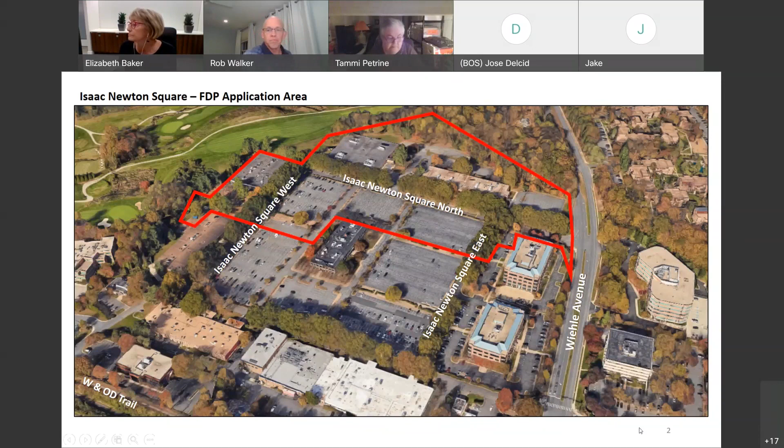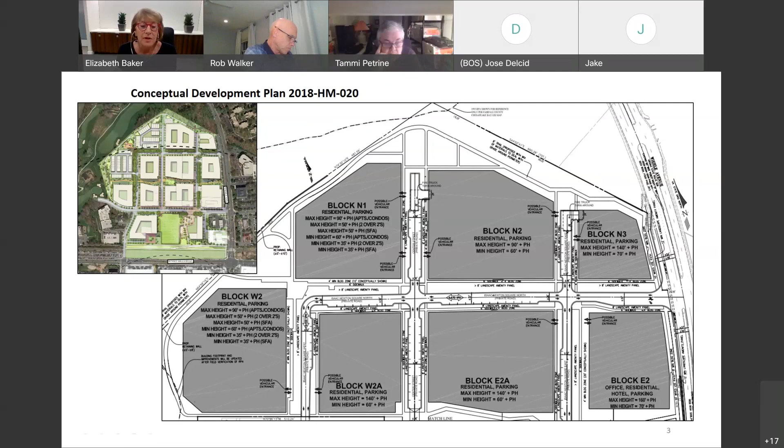In this CDP, there are certain spur roads as well. We have Isaac Newton Square East, which goes between blocks N2 and N3. We have Center Street, which goes between block N1 and N2. And we have Isaac Newton Square West, which is between block W2 and W2A. So you can see these are the building blocks of the future, but what we're going to talk about is just the road. So if you go to the next slide.

In addition to this, we're making improvements to Wiehle Avenue, from the northern property line to Isaac Newton Square North. What's happening there is the construction of a multi-use trail that's 10 feet wide, with additional landscaping between the trail and Wiehle Avenue. These are all 2-lane roads, and generally they have parking on one, sometimes both sides of the street. They measure typically 24 feet for the travel lanes and another 8 feet for the parking lane, for about 32 feet in width.

This is consistent with what is shown on the approved conceptual development plan. Next slide.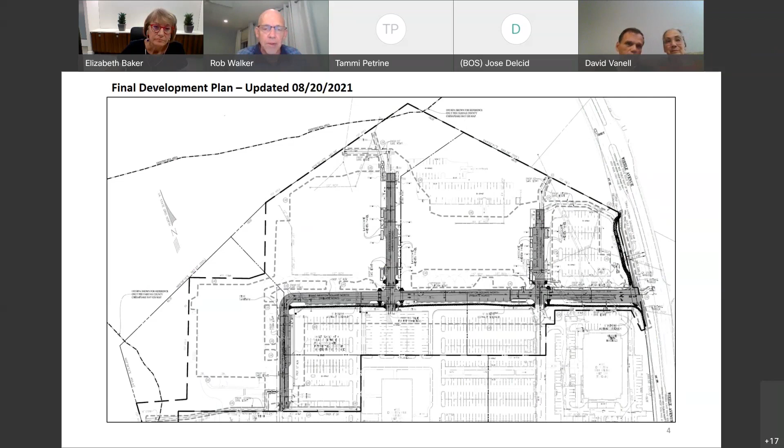The applicant did respond, and I do like the response. I'm still not crazy that there's that note on sheet C17 that seems to give a lot of flexibility about eliminating any tree preservation and tree save. So I'd love to see that note eliminated or removed entirely. I understand the goal of trying to create some flexibility, but that note was pretty broad, too broad for my liking on the FDP.

So with that, let me jump in and go to, let's see, Rebecca. Hey everybody, thanks for your presentation.

I also had a little concern about the distance between the sidewalk and the roadway, especially on the Wiehle side, where you're going to have utility underneath that pathway, and then 12 feet, and then Wiehle. I'm a geotechnical engineer, and structurally you're going to have compacted new fill, and typically our recommendations are that you extend that new fill 5 feet from the limit of your sidewalk or paved area, which actually encroaches into that area of the landscape.

And we've been seeing a lot of issues with landscape areas in Fairfax where the soils are just too compact because of the structural need when placing it, that even when they excavate it out and try to place something in, there has been some difficulty for the trees to take root and survive in those areas. So that's my primary comment and concern in that region as well.

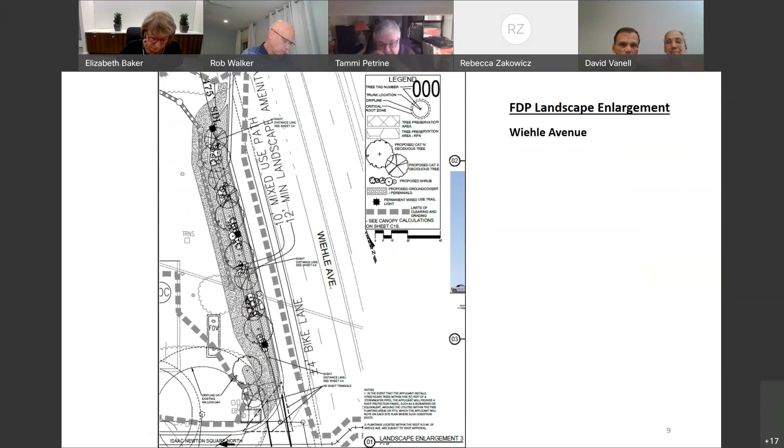Thank you. I am equally concerned with the trees. I just wanted to clarify, when you said this is the street layout only, I'm assuming that there are utilities under the streets as well as storm and sewer lines. Is that correct?

Right, this is an infrastructure plan. It does include some utilities as well as the streets themselves, so we're not going to have to tear up the streets later. We're doing it with this, what will be a public improvement plan, the site plan that will follow this, yes. Okay, and how old are the willow oaks right now?

I don't know exactly how old they are. They range from about 30 to 40 inches in diameter. I think they were probably planted back in the 1980s, something along those lines, when the development first started.

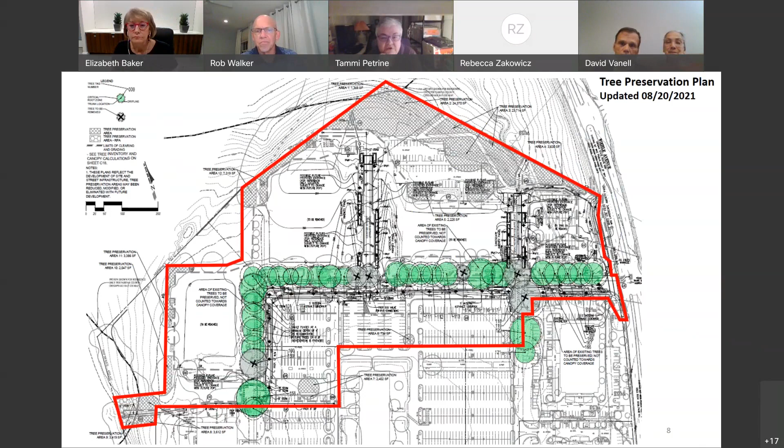My concern is with the street being immediately adjacent to those trees, and the roots communicating both with their neighbor trees and going under the street. When you put the new street in approximately the same area and you're really digging here, we saw on your preliminary concept plan that you were making all kinds of protections for those roots, keeping machinery away from them so the compaction of the soil would not happen. I don't see how you have room to do that, given this tight location adjacent to the trees.

Well, this is the same plan as the CDP with the proffers that are approved. It does talk about being very careful with how the demolition goes, not only for the streets themselves but for the patio next door and the buildings. So we don't envision using heavy equipment next to these trees. It will be much more low impact, by hand in some cases, taking up the street. That's all part of the tree preservation plan that has to be approved by the urban forester before we can do any land development at all.

He has to pass judgment and say our methods for preserving the trees are adequate. There will probably be root pruning and other things the arborists will propose and the UFMD will agree are the best ways to ensure the longevity of the trees.

Yep, this is Frederick Rothmeijer. As I understand, and we looked at this in depth when we went through the CDP and worked with the arborist of Fairfax County to come up with the plan, the root zone does not go under the current streets. Since there is no water coming through the street, there would be no significant root growth under it.

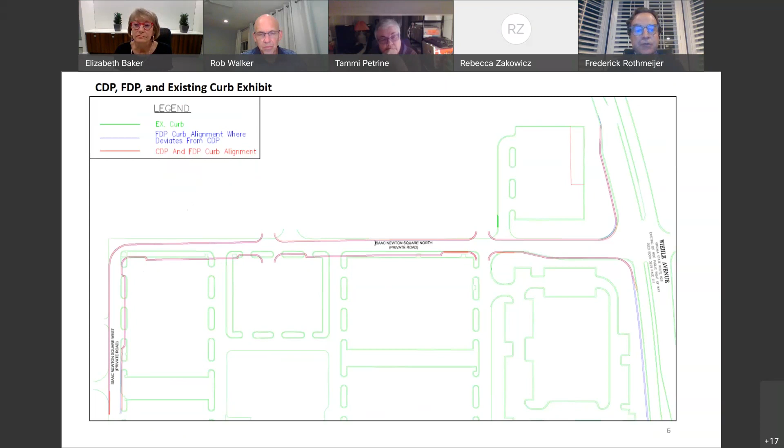As you can see, as Isaac Newton Square North goes to the west, we're pulling the street away from the trees, because the current curb and roads are closer there to the existing trees than where we're not pulling it away. So as Elizabeth said, we're not going to put heavy machinery in the Willow Oak zone. We will be working from the current roadbed and away from the Willow Oaks. We'll have further detail, but we're not going to put big backhoes outside of the roadbed.

As you are concerned and want to preserve these Willow Oaks, so do we. This is an asset for the property. We're fully focused and committed to do everything that is good for these trees to maintain them.

I'm hearing what you're saying, but I've been on a construction site or two, and there's no way in hell you're laying sewer pipe by hand without having backhoes and heavy equipment in there. That's what I don't understand. So the root zone is not under the road, that's not where the roots are, because it doesn't have water infiltration.

I understand that theory, but when we were doing the environmental plan with the same forester you're talking about at Fairfax County, we learned that the drip line is not the end of the roots. Yes, there are more roots on the other side, and yes, there's not a lot of moisture under the road, but I am very concerned if you lose these trees, what is plan B? Because we're trying to have every possible mature tree in Reston preserved that we can.

Isaac Newton came in and we were thrilled this was going to be a neighborhood of park-like development with these mature trees. You're already challenged with your conceptual plan of having huge high rises to the south that will shade these existing trees on the east-west private road, which are the majority of trees we're talking about in your FDP plan here. What is plan B if the trees fail?

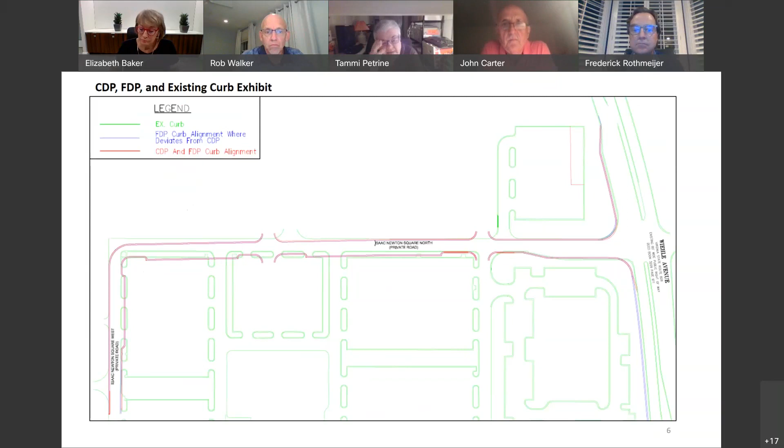No, in the plan, are you planning to have, you showed, Elizabeth showed the slide with the temporary sidewalk on the south side of the street.

Are you planning to have a sidewalk or a boardwalk on the north side of this? Correct, and it's as close to the planned buildings as possible, per the CDP. Those boardwalks would be on sleepers, as we discussed with the CDP as well, but yes, it's pulled away from the trees.

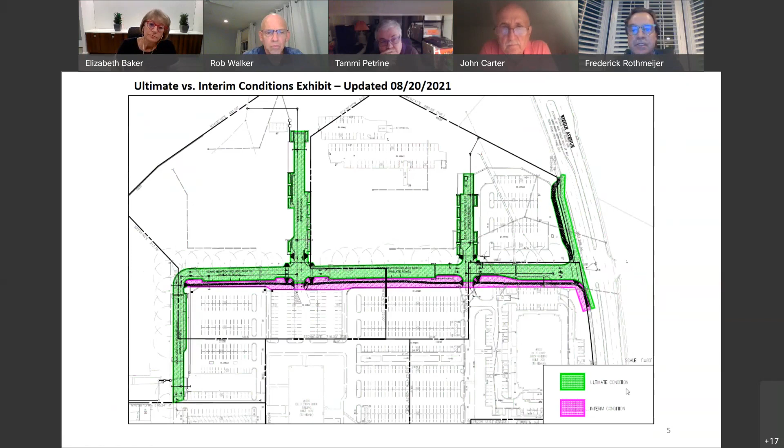I don't know if there's an exhibit going back to the CDP in here. Not in here, but we're going to look quick from the CDP for some images, because Tammi, you're right, that area is planned as a park-like setting and is designed to be very sensitive to the trees. It has boardwalks and the like in order not to impact the critical root zone. Bernie's looking for it now. Maybe we'll find it and show you, but the commitments to that are in the proffers, and we're fully intending to make plan A succeed.

Thank you. I think everybody on this committee is nervous about this, very, very concerned. So thank you.

Thank you, Tammi. Vrushali. Thanks, Rob, I don't have any questions. I had one question with regards to stormwater, which was already asked and answered. And then my other question was the same as Katie McLean's, which has been answered as well. Thank you.

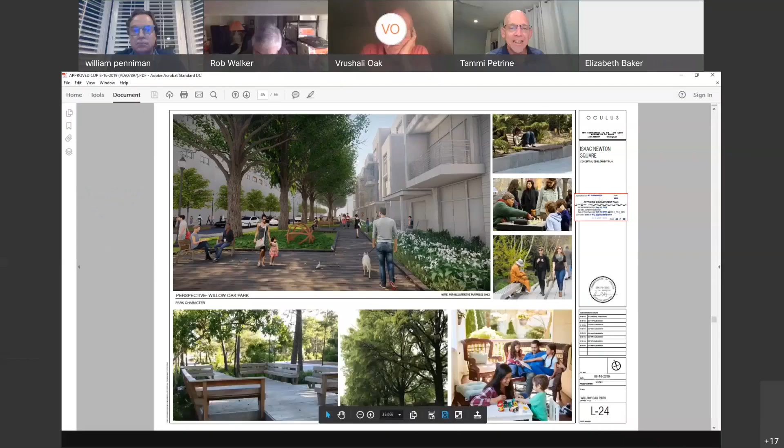All right, Mr. Penniman. Hi, a couple of questions. One, you talk about the interim lighting you're going to install, and I wanted to get a sense of what the interim lighting is versus the long-term plan for lighting, and what are the characteristics of it in terms of type of lighting.

Okay, we also have an image of that, but while we've got this up, let me go back for a minute to show you an image from the CDP of this oak walk, for lack of a better name, where you can see how far back the boardwalk is set from the trees in order to maintain that. So I wanted to show you this is the image we're all committed to creating, this park-like setting, this promenade along these mature trees that will continue to grow and survive for many years.

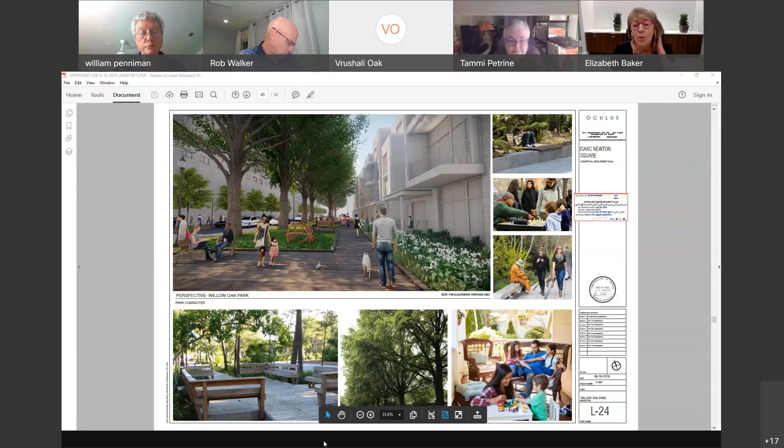We have an interim street light. Bernie, can you find that one? Okay, we're working on that. We're putting the street lights along Wiehle in permanently now, and that was a fixture county staff asked us to use. On the interim, these are pedestrian type lightings. When we go to the final development plan for the first development, that's going to set the stage for the materials, street furnishings, and light fixtures that will be used consistently throughout the development. They may be different than what's on Wiehle, but they will be consistent throughout. So that is yet to be chosen, but for the interim, we're finding it here, we do have an image of it. Sorry, we're not as fast on the imagery as we'd like to be.

No, that's okay. On Wiehle, is there a conformity to other lighting in the area? If you worked it out with staff, I assume that's the case, but can you answer anything on that? We asked them what they would prefer as their street light there, and they provided a particular fixture and we included it. I don't know that they've used it elsewhere or not. Certainly a question I can ask them, but I don't know if other applicants have used the same light fixture.

Okay, in terms of the stormwater management, if I recall correctly from the paperwork you submitted, you proffered to retain 25% of a one-year storm on site. Is that correct? Because you're also showing tables here on 2 and 10-year storm retention, and I wanted to get some sense of what percentage is retained on site with the vaults and everything else in the 2 and 10-year as well as the 1 year.

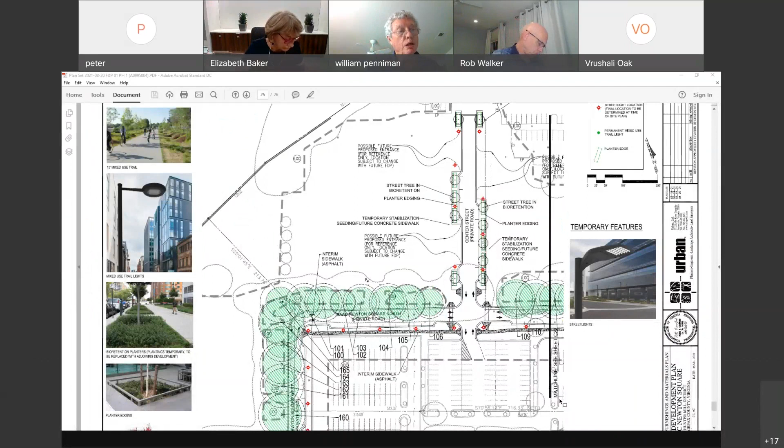Does that answer your question? Because I don't, the percentage question, I'm not quite sure how to answer that. Are you asking like of the site area, what is the percentage of the area that's being treated? I think in the existing comp plan, there's a requirement for developments that involve existing impervious surfaces of more than 50%, that there has to be a 40% reduction in the runoff as part of that. Now you're saying you're returning it to good forested conditions, so that may be more than a 25 or 40% reduction, but I don't know. And that's why I was using a percentage term, but can you relate those concepts?

Yes, and I'm going to look up the percentage. The comp plan has a 20% reduction goal. The proffer says that you're going to reduce the volume of runoff to the 2-year 24-hour storm by 25% from the pre-development runoff amount.

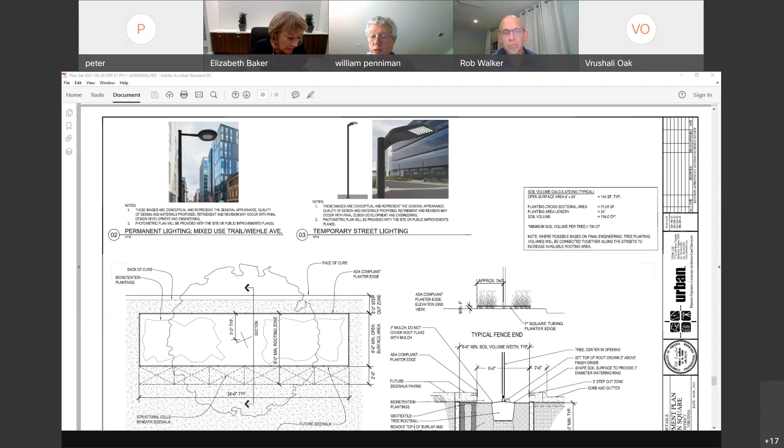Well, that's right. Or there's alternate methods, which is essentially what the county recognizes as the energy balance method, which means if you can't reduce the actual volume of runoff, you over-detain the rate of runoff in order to make up for the increase in volume. So the theory behind energy balance is that the volume of water times the rate of water in the pre-condition should be the same as in the post-condition. So if you increase the volume of runoff, you have to reduce the rate even further to make up for that volume. That's the alternate way of meeting that requirement, which we are meeting with this plan.

And how does that relate to good forested conditions? The layman's way of answering it is we're not adding any hard surfaces, impervious surfaces, we're taking away, correct, Pete? Yes, on an interim basis. And then all these tree site wells are basically storm filters. Well, yes, that's part of the answer. So in the interim condition, because we're removing buildings, we're actually decreasing the amount of impervious area. However, all the computations and the sizing of the facility are in anticipation of those areas that we're removing being infilled with future development. So that's really a temporary condition where we're reducing the impervious area.

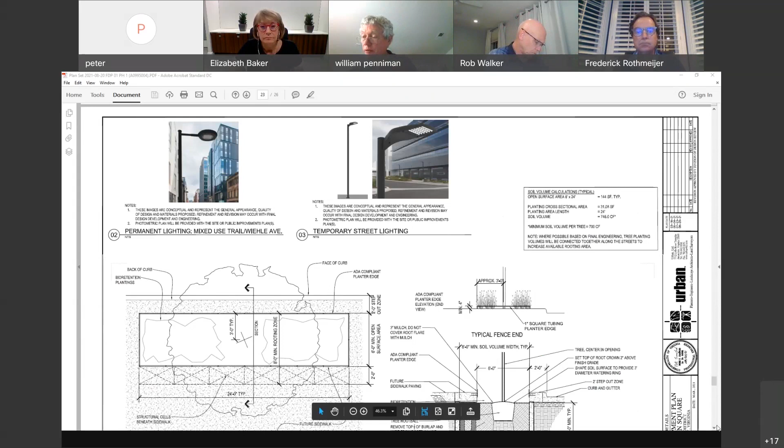Thank you. Oh, one other question, just to give us a sense, if you have a vague sense at least. This is an interim movement to lay the groundwork for upcoming development of new buildings, which in this area, I guess, are all residential buildings. Do you have any ballpark sense of when that may start?

We don't know for sure. We're hopeful that we'll be having an FDP on one or more blocks on the north side of Isaac Newton Square North in the next 6 months, but can't promise. That's our best guess right now.

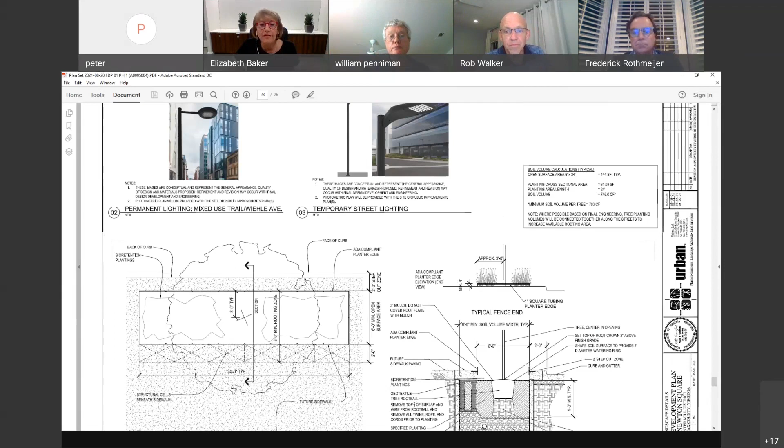Just a guess. Looking at the plan we have in front of you, Bernie, if you can scoot it down a little bit, the fixture on the upper left is the trail. Uh-oh, what happened? Something happened. Sorry, here goes, it says it's scooting.

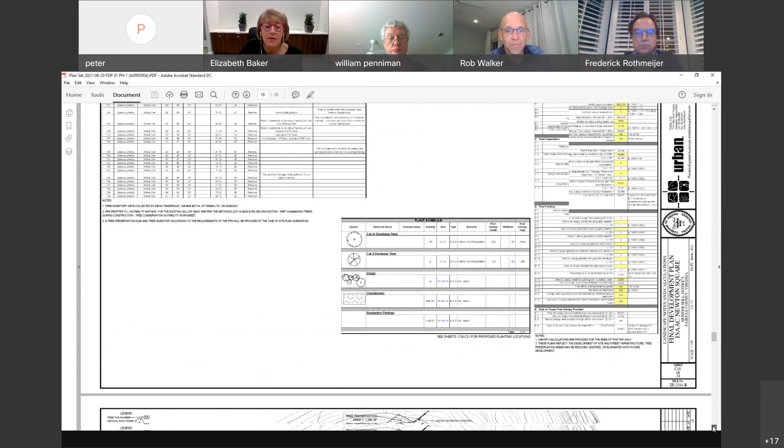The one on the upper left we're going to see is the one that goes along Wiehle Avenue, and the one in the center on the top that we're going to get to is the temporary one we're looking at. It'll be based on the photometrics. We're showing three of them along Wiehle Avenue, but we will have to do a photometric plan with the PI plan. Okay, that's good.

So the one on the upper left is, as I said, the multi-purpose trail one, and this one, which is a little different, not as round, a little more oblong, is the temporary street lighting for the south side of Isaac Newton Square North.

Do you know the color temperature you're going to be using, is it LED for one thing, and do you know the color temperature? I'm going to punt that one to Pete if he knows the answer, because I do not know the color temperature. I don't know that either, Elizabeth.

If you could look into it and consider the impact on birds and wildlife, bats, birds and wildlife, because that's what color temperature is relevant to. Insects as well. All right, good to know.

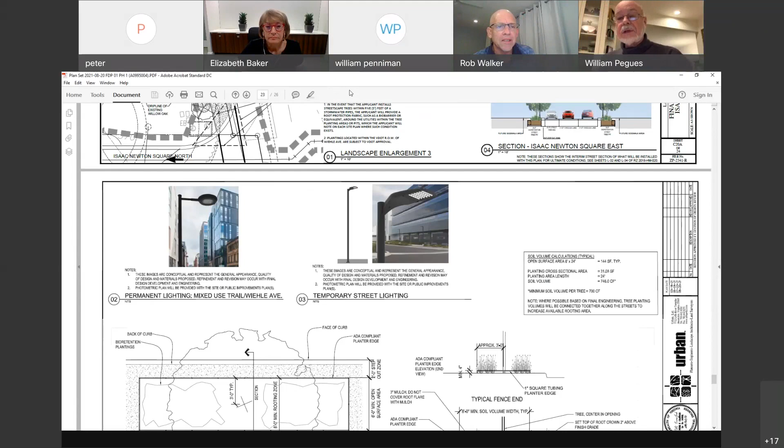Actually, there can probably be a pretty quick response related to the color temperature of the lights, because there was a lighting fixture study that actually picked those, related to Reston Board of Directors. And the paper went through the other committee that I'm on, the Environmental Advisory Committee. So that's probably out there as to what it is, but whatever temperature, because the power company is providing them as some kind of a discount. There was some discussion about the color temperature, and that was approved in an actual paper that's available through Reston Association.

Anyway, the other thing I wanted to mention was that regarding the rainfall and stormwater retention systems, of course, county requirements are essentially the minimum, not necessarily the best practice, but they're the minimum. And regarding stormwater, besides just what's being done at the streets and in the infrastructure, vegetative roofing can provide a tremendous amount of control. You can put vegetated roofs on any kind of structure, including wood frame with a wood deck, and it works just fine and can really help retain a lot more water.

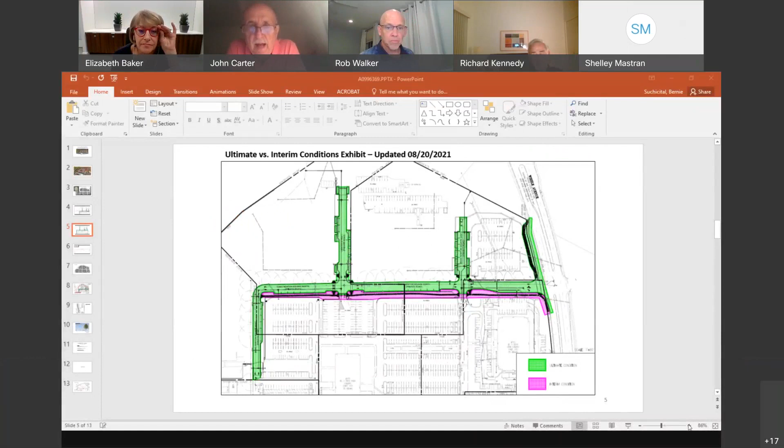That one with the two colors, I think green and red. The green and the pink one from the PowerPoint presentation is probably the best one. It's hard to see because it's such a big area on such a little screen, and it's difficult. Can you make it bigger with the slide? There's another one too. So I didn't realize that pink.

I thought you were just going to the curb. To the extent that you get over into the sidewalks, I think we don't want to commit to that. Well, the only place we are doing sidewalks is the ultimate trail along Wiehle, because it's just a good thing to get that established and get that going. And we're doing an interim sidewalk along the south side, because we need to provide pedestrian access to these existing blocks on the south.

These buildings are still there, people are using the parking lots, they might want to take a walk at lunch, all those kinds of things. Staff in particular wants to make sure the interim conditions will be useful and attractive to people. Because to be honest, we are planning to build on the north side first. Those blocks are going to be what you see here and a little to the west. So what's going to stay on the south may be there for 5 years, it may be there for 7 years. We don't know, so we want to make sure we have pedestrian access.

That's, in my terms, the green and the pink or red, whatever color that is, the actual extent of this. Anything in the pink is interim, and the final will actually come back as part of the site plans for those buildings on the south. Is that correct? Yes, that is correct. I think that was clear, maybe other people realized that, but I don't think it was clear — but definitely when you get to the presentation.

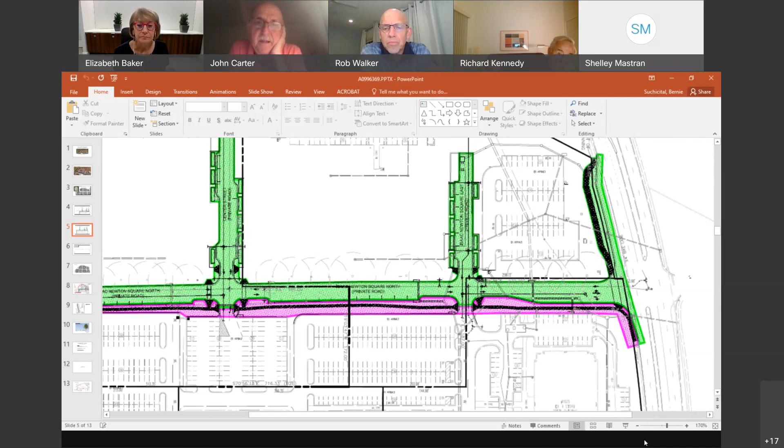Now I do have some issues. Number one, the Wiehle bikeway — that hasn't been on there before. I like that better. I don't like the trail, and why are we doing an on-site trail in addition to an off-site trail? Are we actually moving the curb on Wiehle? Maybe that's too technical, but... We are doing it, it's a couple of feet, moving the curb just to create the bike lane.

There will be an on-road bike lane and there will be a multi-purpose trail — both facilities are planned. Why are we doing that? Because you cannot get to the on-street lane otherwise; you'd have to go across the grass and jump the curb to get to it. Why would we do that and move the curb?

It's part of the comprehensive plan to have this multi-purpose trail. It's not that specific, well — I don't see the bicycle plan for the county, it shows on-road bike lanes, so we have to provide the on-road bike lanes, moving away from on-street bikeways in general. Then the multi-purpose trail is designed all along the west side of Wiehle, going all the way towards the metro station. It's supposed to be continuous, and it takes different forms — if you look at the comp plan, the closer it gets to metro the more urban it seems, and further away it gets looser and more suburban. Both of those are comp plan elements we were asked at the rezoning stage to accommodate.

Rob, if I could interject here, John — my recollection is that when we talked about the pathways that needed to be enhanced or built during this new comp plan, the idea was that along the major streets we should have separated bike paths and walking paths. And I think Wiehle was a specific example of that when we went through it.

Without seeing a more comprehensive view of the whole area and the latest thought for this corridor, and having co-chaired the Wiehle Avenue pedestrian crossing right up the street, there's even yet another study that's going to be conducted by the county to figure out the best thing to happen along Wiehle Avenue from a pedestrian, bike, multimodal point of view.

I think that just goes to Sunset, though. I don't know that it would go this far up. I know the study was supposed to at least go to the W&OD trail.

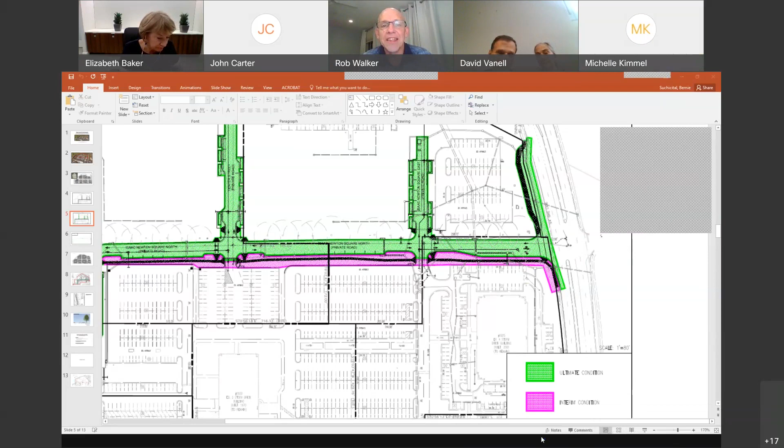That's correct. Can you hear me now? Yes, John, we can. John, are you still with us? Do you have any further comments?

Hey, Rob, while you're waiting for John Carter, can you hear me? This is John Kauppila. Yeah, John, I got you. Do you want me to just go real quick while we're waiting for him to reconnect? Sure. Okay, if he jumps back on, I'll stop.

I totally agree with all the comments we've heard so far. What I was going to suggest on Willow Oaks is that perhaps we get a cross section showing the trees, the road, the utilities, how deep they are, their area of influence when you're digging, so we can really understand that. And I think you said it, Rob, really showing a defined tree protection plan and how we're going to save those trees, because once you kill them, that's it.

Their plan B is not a good one, as Tammy talked about. And I saw that there were some electric lines and lights on the north side. How you do that is going to be essential, because if you just run those lines right along the route boundaries, that in and of itself will take out the trees.

Two other separate comments, one regarding detention and stormwater. I do know that Hidden Creek is working with the county on dealing with the flooding issues in that area, which we all know there's quite a few. I think dumping the water just onto the golf course and that whole system without really coordinating that with Hidden Creek and the county is missing a very important point here. So I think that's key — how do we incorporate this stormwater into that system correctly without adding to the problems we already have?

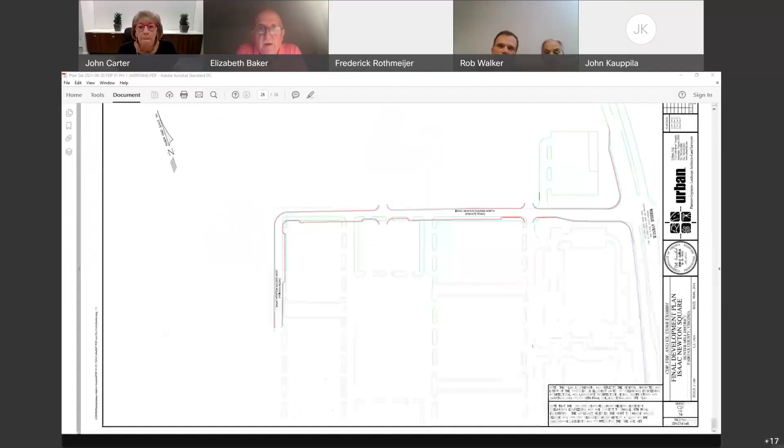My last question on the trees—could you pull up one of those drawings that has that on it? Why are you moving the curb on the west side of this? The west portion of this street moves the curb, which I think puts those trees, to the extent that they're over there, in jeopardy. We're pulling them away from them, John.

They're on the north side there, so we're pulling the curb away from the willow oaks. They're actually getting a little bit up in that, where that corner makes a hard turn there. That is where the road is moving away from the willow oaks.

That's where Fred was telling you, they're a little bit closer in that location than to the east. So we have tried to pull the curb away to give them a little bit more room for the future. Maybe it makes some sense to do it that way.

I was listening to Tammy and others talking about keeping construction away from those trees, and that looked problematic to me when you're moving curbs and things, but maybe you can do that in a delicate way. It's, I guess, a compromise between the existing curbs being too close and trying to preserve them by moving the curb farther away. Maybe that'll work. Okay.

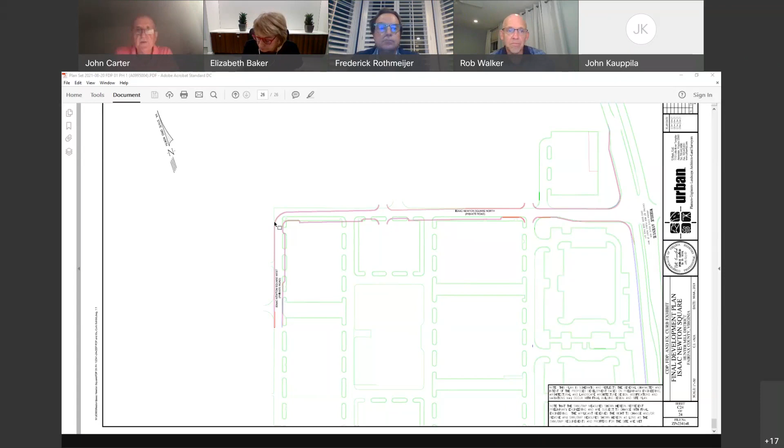I still don't like the street width. I really don't like 12-foot lanes in pedestrian oriented places. Maybe that's an issue with staff.

It's not too bad, but we really—I mean, it's 12 feet, including the gutter pan. You have a gutter pan, then 10 feet of asphalt, center line, 10 feet of asphalt, gutter pan. So, I know. Yeah.

There've been presentations to the Board of Supervisors, particularly by Rachel Flynn, saying we shouldn't have anything bigger than 10.5-foot lanes. I think we ought to be minimizing paving for a couple of reasons. One, there's an environmental reason, but there's just a pedestrian oriented reason.

We have a terrible street plan in Fairfax, particularly on the private streets. We don't have one street in Reston, one new street that supports pedestrians getting across it. And you can't get to the metro station easily. This is a tremendous problem with the Silver Line.

And the Planning Commission has recognized this, and the Board of Supervisors has recognized this. I'm not sure the staff has or has not picked up on this issue, and we have got to get changes to this. Maybe this one is okay for now, since I think it's the first one that's coming to the commission since those follow-on motions have occurred.

But you know, this is just a tremendous issue. If you can't get to the silver line, we've wasted a lot of time doing comprehensive plans and increasing density and spending hundreds of a million dollars on a transportation system that you can't get to as a pedestrian. So as this one moves forward, be mindful of this.

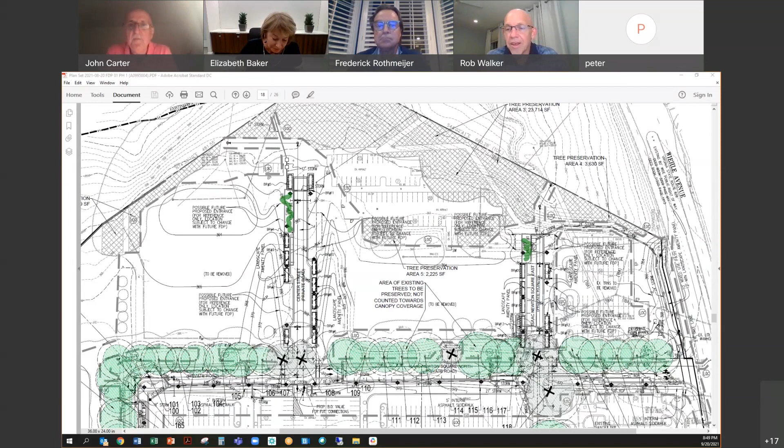All right, that's enough of me, but I do think these street standards are a problem that we keep using and we keep failing. I think staff assumes staff gets to pick those street widths. I don't think that's the case. I think that's up to the Planning Commission and the Board of Supervisors. So be careful of that.

It's a little more difficult on the public streets because you've got other people involved. You've got utilities and you've got state highway in addition to Fairfax County. But I hope you can do something special

on the private streets. And I like the section that you've shown, and a hint at the kind of fixture that you would use. I hope we can come up with something like that. Maybe the first application that comes in for a building where you're actually doing the streetscape, we can put all this together in a very convincing way. Really important, something to do.

Otherwise, you can't get to Metro as a pedestrian. Well, believe me, this development wants to get to Metro. I would have thought so, yep. I would have thought a lot of other ones do too, but okay. Thank you, thank you, thank you, Mr. Carter.

So we've had a lot of comments tonight. The applicant is going before the Planning Commission on Wednesday, so we need to decide where we're going from here. It would take a motion from someone to act on this application tonight. I will just first say I'm recusing myself from voting, just so I get that clear. But I guess, any final comments, or does anyone have a motion to put forth?

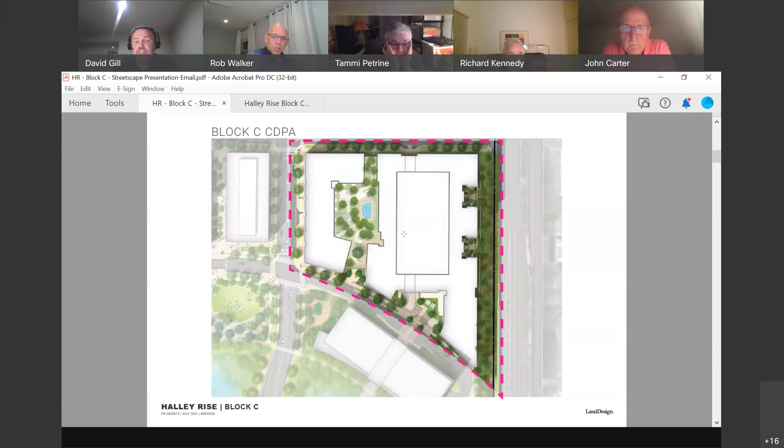But that's how we're designing it now, and the level of amenities that we're talking about with this particular application. The limits of the CDP or the FDP itself are the sidewalks around the property. We are not touching the public roads C, A, or Reston Parkway as part of this application, just to give you some additional context there as well.

We'll go ahead and jump into some of the larger community elements. We brought forward the same design team that Brookfield used with the larger CDP so that we have continuity of design palettes, the types of plantings, widths of sidewalks, the type of paving that we're talking about. So this is showing what we're talking about in our pedestrian zones throughout the 4 sides of this project.

These are the same furniture too that we're committing to, benches, the same milieu for the lighting, bike racks, cafe seating throughout the project, again, to mirror the public realm being established by Brookfield as part of their project.

I'll try and jump through this pretty quick because I know we're running late here, Rob, but this just takes you around all 4 sides of the building. And again, it really is a 4-sided architecture.

This is looking south, so almost as if you had crossed over Wegmans and we're walking down the sidewalk down Road C. On the left side would be the retail environment that we're establishing, really trying to activate this plaza with active uses. I'll show you how far down the retail goes in some of these other slides.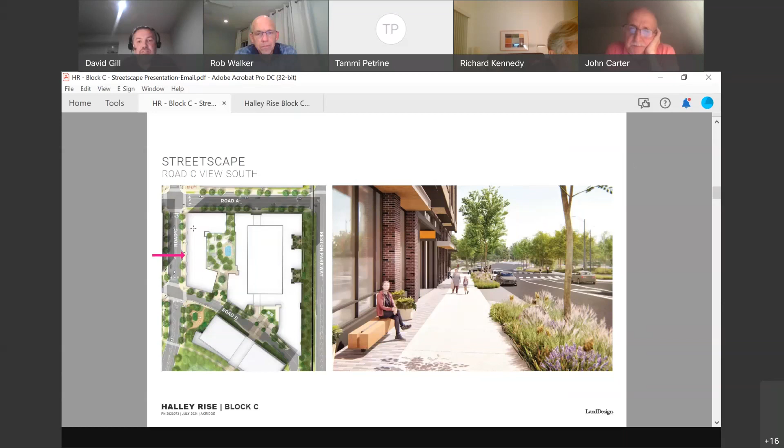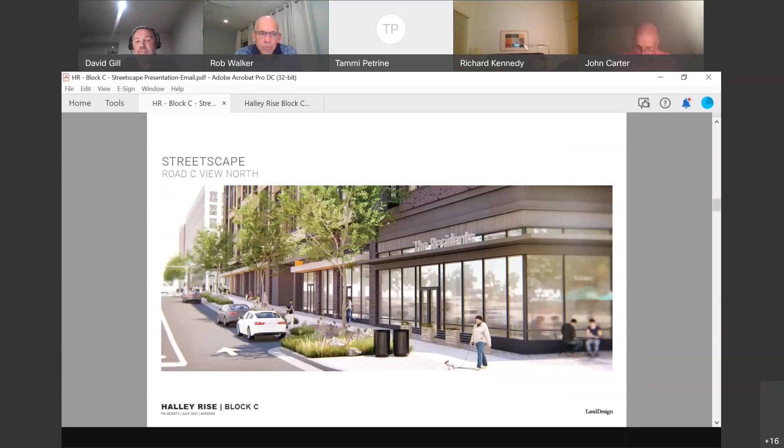This would be the same look looking back. The Wegmans would be up here at the corner. Our residential lobby here at this corner opposite the two parks. Our retail here and here anchored along this side of the street.

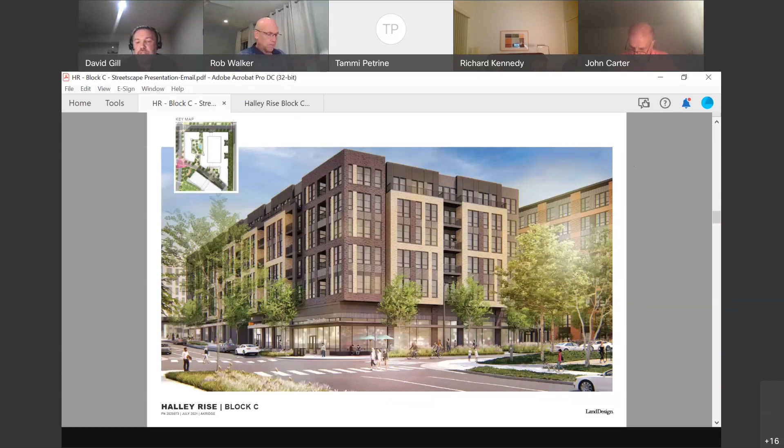This is pulled back to give you a sense for how finished we think the architecture is going to look here. A variety of textures, primarily masonry in a lot of these facades, use of balconies, and a variety of window sizes. You can see in the background a little bit of how it differentiates from the other building that will be the rental building that is wrapping their parking garage.

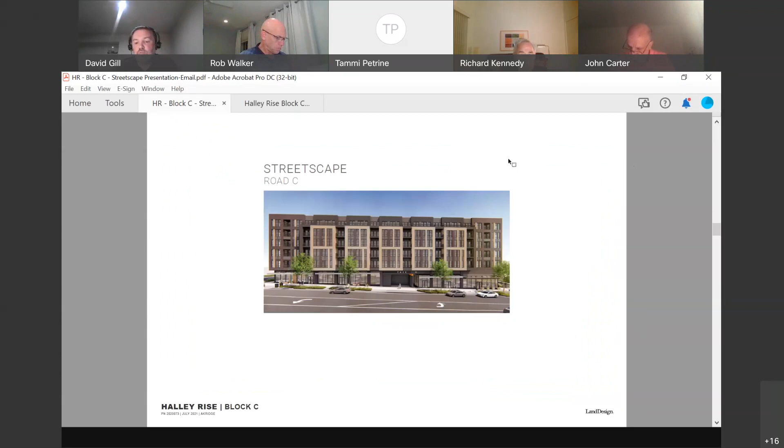We go ahead and jump forward again. This is the facade itself. This would be looking across Road C, so looking east in this direction. You have your retail all along here and here, and then the residential lobby here as a way to really activate this key Road C, which is our main pedestrian street.

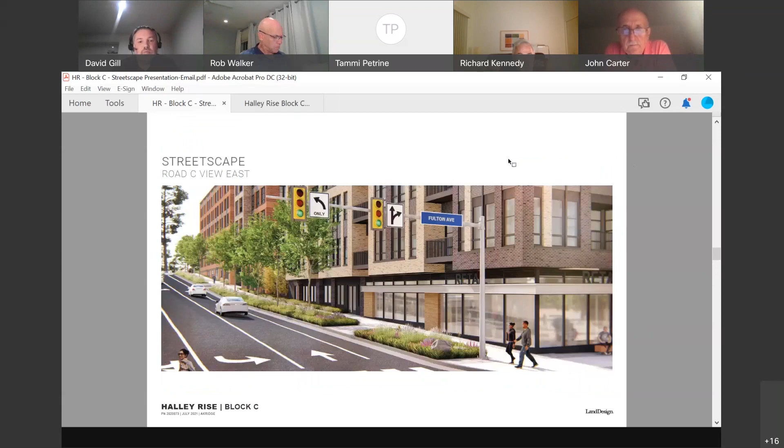Apologize as we jump through. So this is what is thought of as directly opposite as you go up the corner.

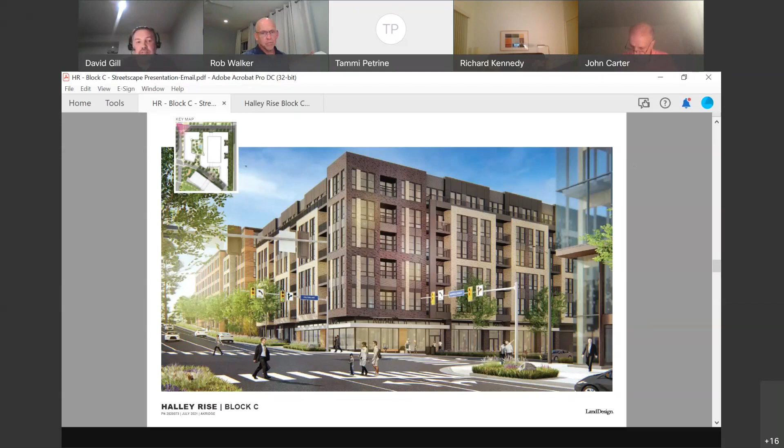I'll keep going through here. This is what it would look like if you were standing basically looking out from where the Wegmans was. You get your retail on the corner on the right side, come up the hill, going to Wegmans on the left. This also shows the differentiation in height between the two buildings, the two different palettes being used to distinguish the buildings themselves.

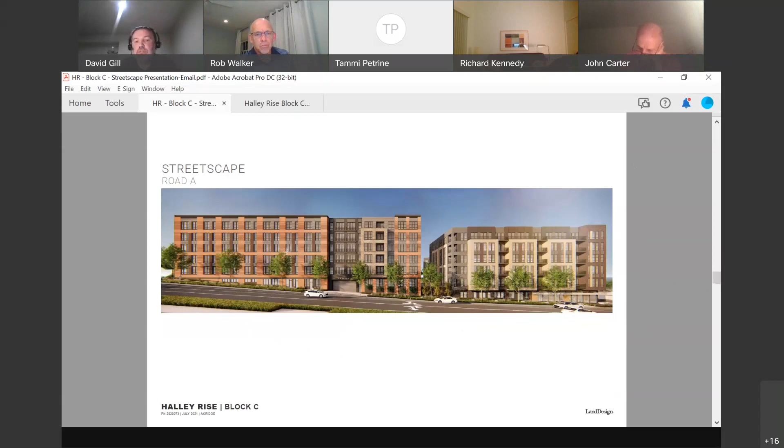Apologize for that, that's a fast forward here, guys. I'll jump back.

This takes you around the corner again. So this would be Reston Parkway, looking at the building from Road A. Again, it falls away to the right where you go to Wegmans, and then to the left as you come down Reston Parkway itself.

It shows the same double row of trees committed to with the CDP FDP, as well as the trail itself that's being put in. And then what we really worked on here was providing a variety of depth and little private courtyards to break up the mass of this facade along Reston Parkway.

As importantly, it helps us wrap the garage behind it, so you only see finished residential structure from Reston Parkway. There is no parking structure that you see. It is truly a four-sided building in that regard.

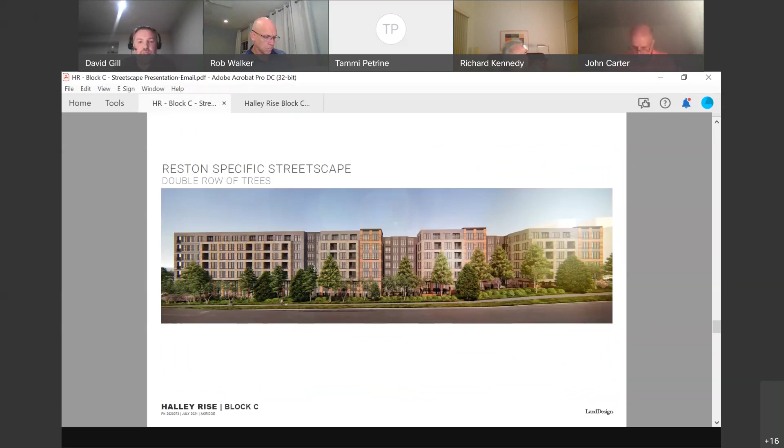This is how it looks from Reston Parkway as you come down. On the right, again, would be that Road A, all the way down to the left. You can see those two courtyards that we're using to break up the mass, and then additional smaller variations in the facade as you keep moving down the building.

This is our entrance here to the primary residential lobby and the primary entrance on Road D to the parking structure. This parking garage is, again, shared parking for this existing office building here, as well as for the residential.

So we worked hard with staff on coming up with a design that bifurcates the residential and office uses after they park. The office users would come in now to this shared garage, park, come down an elevator bay here, and have a dedicated pedestrian walk over to Office A. This is a segregated pedestrian entrance that is separated from the primary vehicular access right here.

So if you're coming to the office building, you come down, come in here, get out, and then walk across without having to cross in front of the main pedestrian drag. There is a lay-by here as well for drop-off for the office, and then a smaller lay-by here for drop-off for the residential.

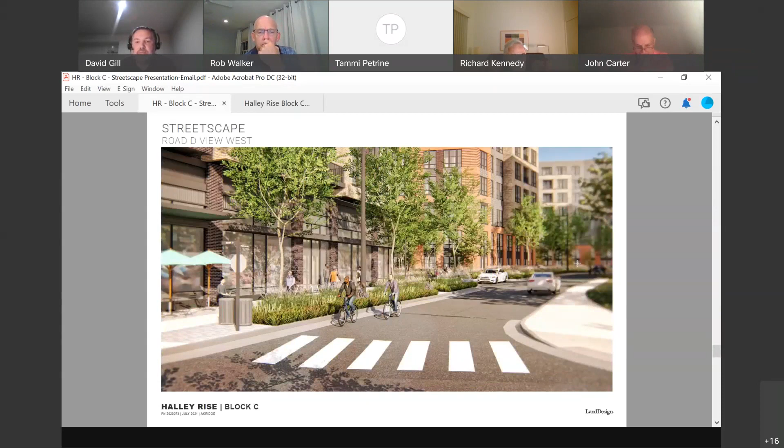This again just gives you a sense for how that would work in practice. A little bit of the lay-by is shown further down. You can jump forward - that's how we're talking about it working here.

So you have the lay-by in front of the office on the left, in front of the residential on the right, and then a dedicated pedestrian crossing here. It's also going to be a raised tabletop so that it really signals to cars as they come down that they're entering a pedestrian realm, and that they need to make their decision to enter that garage now.

Further down, it is essentially a service connection. The only thing really there is loading for the residential building itself as you go down Road D. So we're really trying to encourage that movement into the garage and make it separate from the pedestrian.

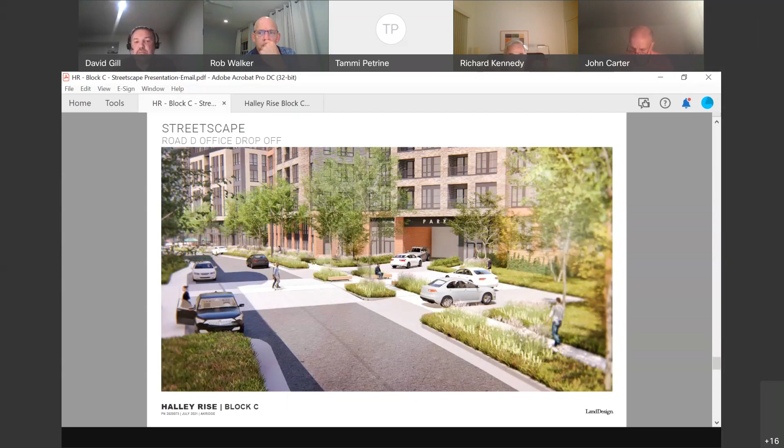This is how it looks from the existing office. If you sort of fisheye it a little bit, it's not quite 100% perspective, but again, it gives you sort of a view for what we're going for.

We do have this elevated courtyard up here that would provide amenities that could be shared between the two buildings and provide some nice views down onto the parks that are proposed both to the south and southwest from here. And then on the north side, there's also a jump lobby that allows you to get down and cross over to the Wegmans.

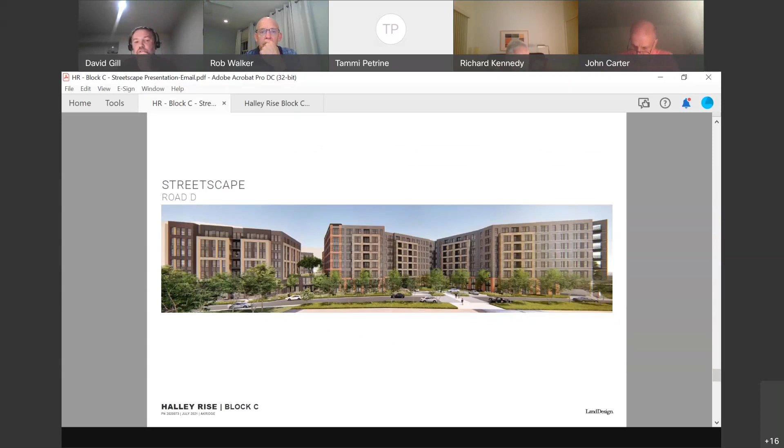I'll keep my presentation brief there. I'll ask Jay Johnson if he has any additional comments at Meridian, but that's really what I wanted to share with you tonight - making sure we have any preliminary concerns from you guys addressed as we move through getting our final report from staff, which we're hopeful will be probably mid-October at the rate we're going.

On behalf of the Meridian Group and Anchorage, this is Jay Johnson. I'm an independent consultant for the two firms that David mentioned that are co-applicants on this project. It's a pleasure to be here. I think David has summed it up quite well with the presentation, and we welcome your questions.

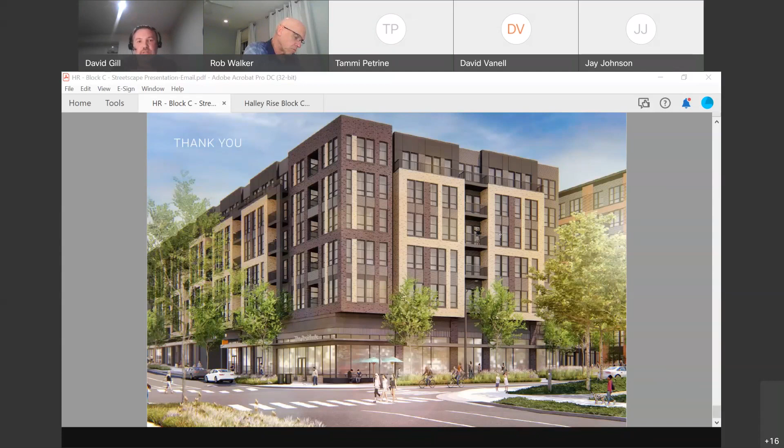So it is at a FDP level, and Pete Crawford, you can help me with the precise numbers here. But again, it fits into the larger Halley Rise project. Let me see if I can page back up. Is that by county standards? Oh, absolutely, and in fact they've gone above and beyond.

So these parks, and Mark Looney, if you're still on, you can correct me if I'm wrong, these parks are being installed currently across the street from us, and they were intended to serve the entirety of the Halley Rise project. So I understand all of the...

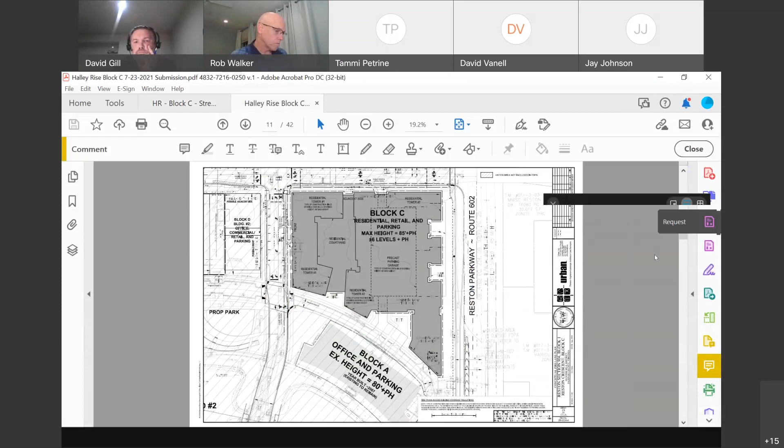Just reacting to the streetscape character - I'm looking at page L04B. I'm just struck by the massiveness of the buildings and lack of greenery, and I'd like to see more. In Reston, we go far beyond what Fairfax County demands for open space, and I think even though it's in the TSA area, I would like to see more greenery. Also, I don't know if you're planning greenery on the rooftop.

Yes, we are looking at trying to install an intensive green roof on this plaza, and we're working with staff on precisely what we need to do to meet that objective. So we will be including that in that location.

Let me just jump in generally on the overall development. The entire Halley Rise project has a proffered conceptual development plan that includes both an open space standard as well as an urban park standard applicable to the development overall. As David mentioned, there are a series of park facilities being provided, and a lot of it is surrounding the existing stormwater management ponds, which are being converted into true amenities as opposed to places to collect rainwater.

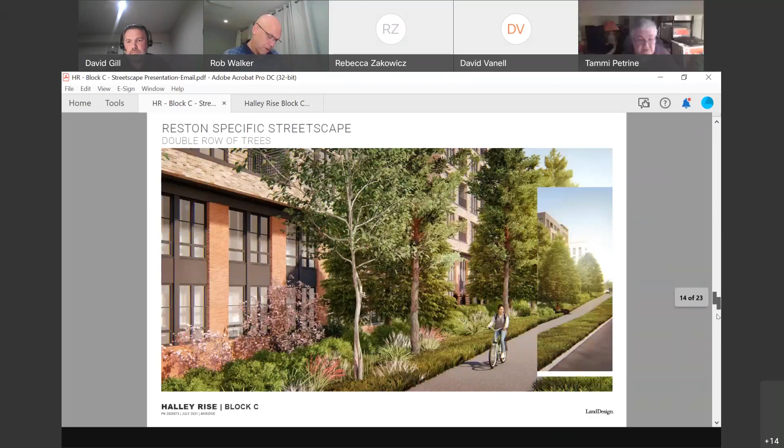I noticed, or I think I read in your plans, that you're considering putting all of the WDUs in Tower 2, which is the rental unit. Is that an error in what you sent us? I'm a little sad that some of the WDUs wouldn't be in the purchase building, which is Tower 1, the west building, correct?

No, that's correct, Tammi. That is what that note says, because we're still wanting to make sure we deliver all the units. We're still deciding on that western building, whether it's going to be ownership versus rental. But you're right, that is precisely what that note says.

And the reason is because that's the building that is very likely going first. When we take down the surface, we have to build that garage first to provide that office with their replacement parking. So we'll be delivering very likely that building on the right first, and that gives us the opportunity to deliver those less-than-market-rate units up front.

Okay, so if I understand your plan correctly, the parking for building A, the existing office building, is going to be in the parking structure. You're sort of building a Texas donut, right? In that parking structure and surrounding it.

I think it's a complicated Texas donut, but essentially yes, because we're providing parking that serves two different uses and comes out, frankly, on two different levels. So this would be on the first floor of the parking garage on the south side, and it actually ends up being the third floor of the parking garage on this side.

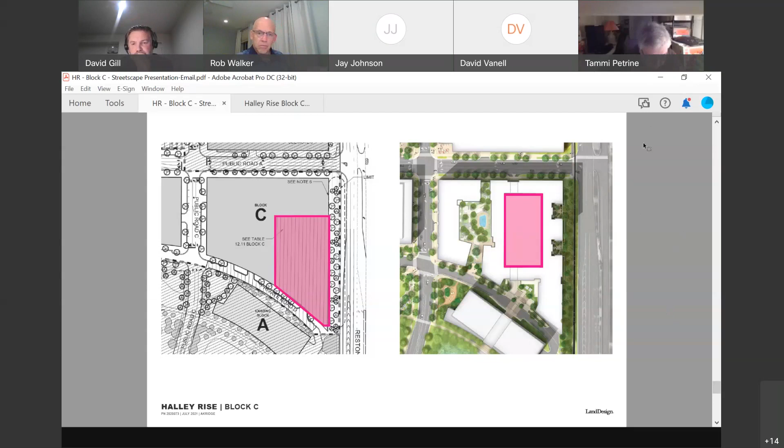Well, Tammi, I appreciate that comment. Pete has stuck around, he's also our engineer, he's been the engineer of record for the entire master plan, and he can speak to that. There is an overall approach working with quantity and quality in the ponds to the south of the site, and we have a determination for that. The work we are doing on the plaza, I hate to use the word voluntary, but it is an intensive green approach to this plaza area. I'll defer to Pete to give you some of the more specifics of the history.

Sure, this is Pete Crawford with Urban Engineering. Just to take a step back, the current site of Block C is an existing parking area, so this is a majority of existing impervious area. The entire Halley Rise, Reston Crescent development is designed to be treated in the 2 wet ponds on the south side of the property, which includes Block C. So Tammi, to answer your question, no new underground vaults or detention with this particular block, because in accordance with good guidance, there's a comprehensive stormwater management plan for the entire development as opposed to doing it individual block by block. That pond is actually oversized.

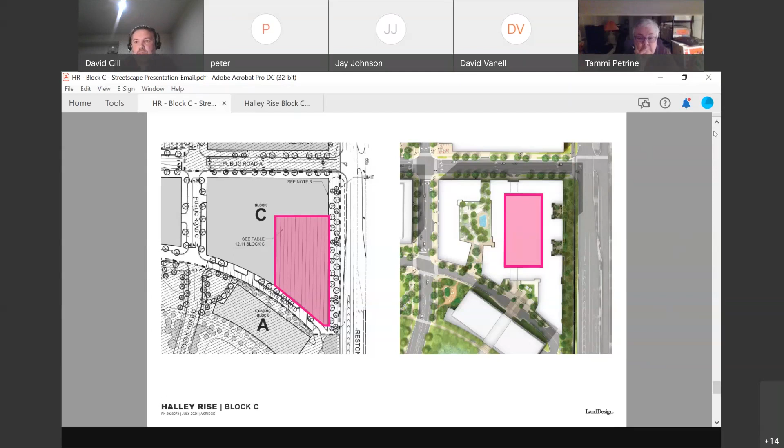Pete, pardon me one second. David, can you back out to the overall master plan so we have the illustrative in front of us?

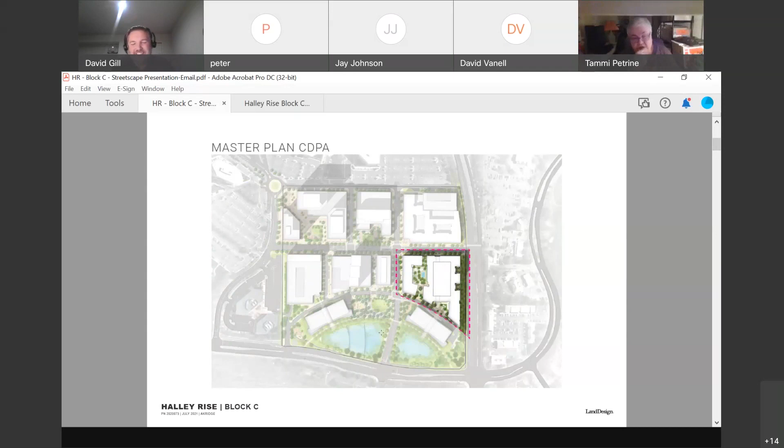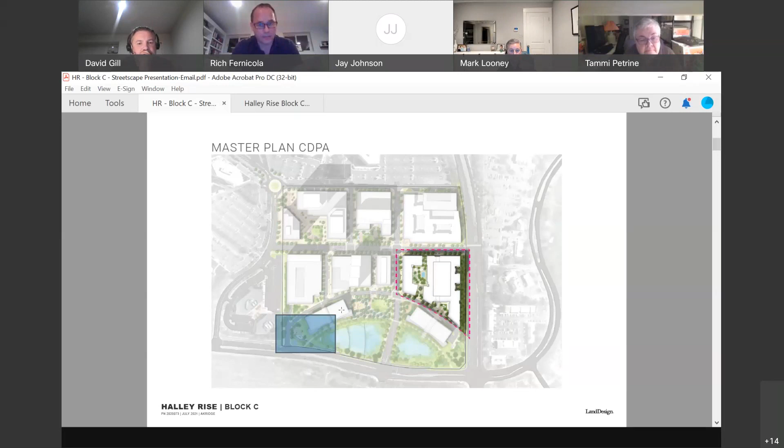The dog park area, you can't really blow it up on this plan, but I believe we had looked at it in two different locations: one to the left of building A just south of the site, and a second to the left of building B on the far left-hand side of the site. I believe, and Rich, correct me if I'm wrong, we ultimately landed down along the lower left-hand side near Sunrise Valley Drive, and a fitness center at the other location - the far southwestern corner of the property. It's actually under construction right now and will be delivered before the first apartments open at the Edmond, which is the Wegmans building. We also have a fitness park under construction just below Block C, which is almost complete as well.

One more question about your tree spec - I noticed some of those species were not native. There are Japanese maples in there. Was that an error, or are you aware that Reston wants native plants, not hybrids or non-natives? If the short answer is yes, we're aware you want native species, and that's what we've been working with staff to get their list of native plants. I don't want to second guess a landscape architect, but river birch, as we're getting warmer, they're not surviving around here now. I just noticed these kinds of things and I'm very concerned.

I know we don't have time tonight to go into the crosswalk across Reston Parkway on the north side of Sunrise Valley, and it's probably not your venue anyway, but those are things we're all going to be real concerned about. I was flipped out when I saw a mid-block crosswalk on these drawings - I don't remember how that was ever okayed or even discussed. We've been trying to figure out how to get people across Reston Parkway and Wiehle. Anyway, thank you.

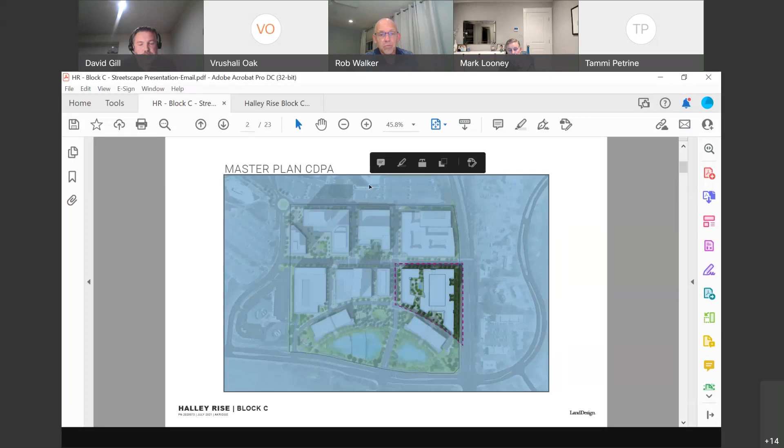So the only 2 blocks that don't have FDP approval for future development are the large block H, which is in the upper left-hand corner closest to the circle - that's a combination of office, hotel, and residential - and then there's office and residential on that block, plus an additional building that could be built fronting the existing parking structure immediately to the south. That doesn't have FDP approval either.

Okay, great, thank you. Did I hear it correctly that there aren't any additional planned stormwater structures or practices other than utilizing those ponds? I'm not sure if I heard that correctly. Is that the plan for this whole development?

This is Pete Crawford with Urban. There is a vegetated roof that's being implemented above and beyond the existing facilities. Okay, and that's for this particular block C? That's correct.

So what sustainability goals does this particular block have? Any LEED tracking? So yes, as required by the proffers, we have to achieve the green building standards that were identified, which include either LEED Silver equivalent or other certification process, but I believe Earthcraft is the typical residential one at this time.

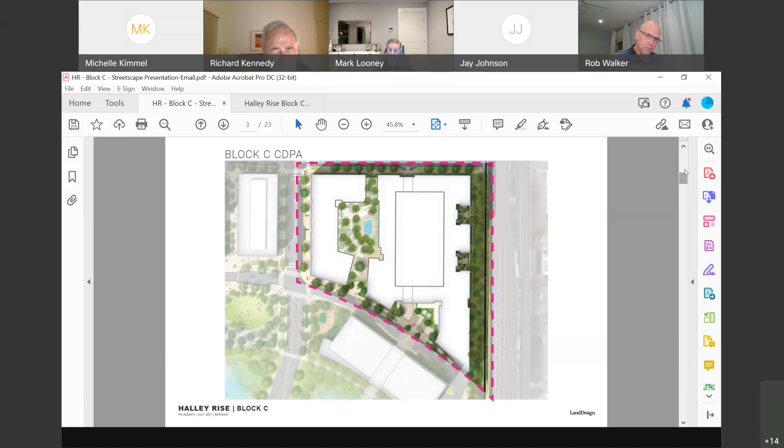Secondly, in our cluster, Waterview cluster, where I've lived for 30 years — I used to be a young person there, now I'm one of the old guys — we constantly hear talk about how we are with new people, younger people coming in. Well, what about electric cars? Where are we going to find a place to refurbish our electric cars, and how is that going to work? I can't help but think a new developer would be well served if they could advertise that we're doing the minimum at least, but we have built in the infrastructure. Bill Penniman makes some great arguments toward that, and I would just emphasize that as well.

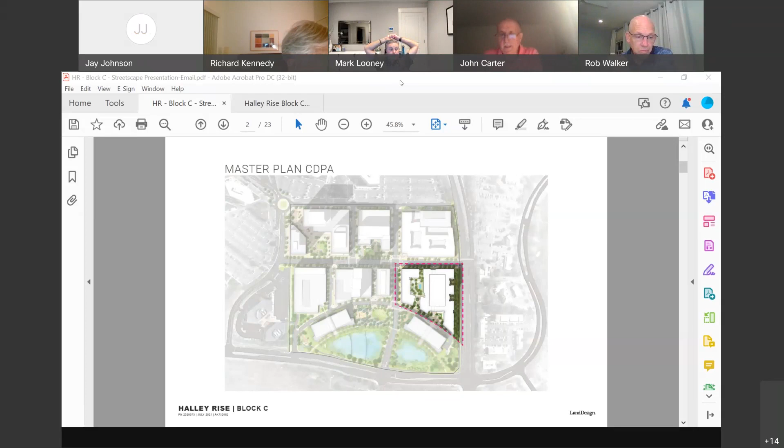Well, sometimes we think of each unit having its own parking, and of course then you'd get into the charging station for each one. It may be a better solution to have banks of charging stations, where each unit doesn't get its own, but instead you have banks like you'd have in a shopping center now, like Plaza America. To your point, John, the parking spaces are unbundled from the sale or lease, so you're not necessarily buying or renting a parking space when you buy or lease a unit. Those are decoupled, so you have to pay extra for a parking space whether you're buying or—well, I don't want to get into what Jay and Akridge and Meridian are planning, but the proffers say that's what you're supposed to do, to decouple the parking space from the unit above. You've got it right, Mark. Yeah, so that's an interesting twist on the charging stations.

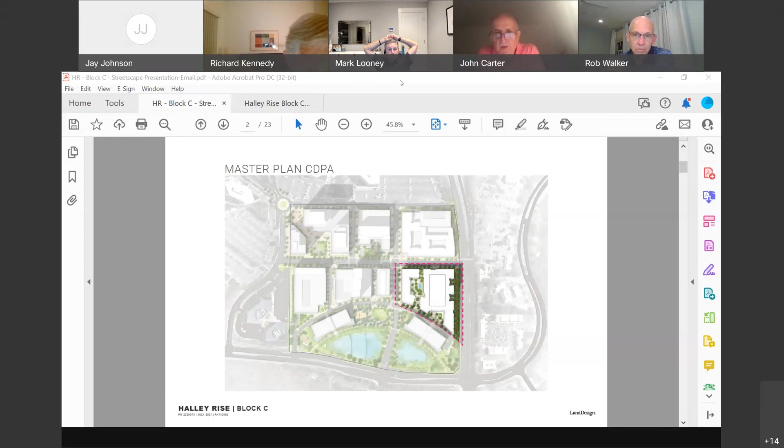And the last point—this might be useful at the Planning Commission. I don't know about this building, but your whole approach to sustainability is interesting. You have a wood office building, so Brookfield is attempting to address carbon sequestration more than any other project has in the area—less on solar panels and things like that, but more on carbon sequestration, which is probably one of the most effective things you can do, particularly in construction. So maybe if that's still highlighted in your project—I know you have the one wood building coming to this group later—but I suspect you have an overall approach to sustainability that was probably a little under-presented, and from an overall standpoint, maybe less on this block, but overall it might be more convincing. So that's enough for me.

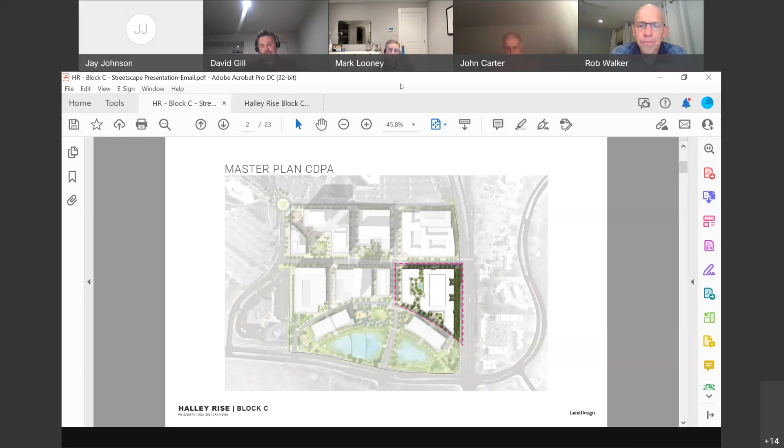And hey Rob, I think we have to look at October with a November 17th date. So if I'm not mistaken, you would be meeting in November after that date, or does that sound right, David? We would, yeah, love to be back. That's what Katie Quinn and staff has offered, November 17th, and we'd love to be able to take advantage of that. So if October's at all open, we promise we'll get the staff development conditions to you and the staff report too.

Yeah, we have an open date in October to have you, so that should work. Okay, thank you. Thank you everybody. All right, thank you.